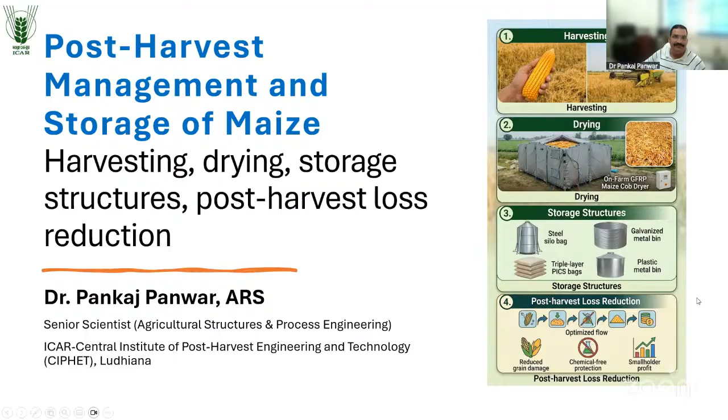As you see here, harvesting, drying, and storage - all these are components of the maize value chain. But the management of post-harvest is started just from harvesting. So we have to understand that timing is very crucial for harvesting, and moisture content generally we observe is 25 to 30%.

But there is one point which I would like to draw your attention to. Before shelling, that 25 or 35% moisture content should be reduced up to 17 to 18%. Otherwise our grain would be broken or quality will be seriously affected - I mean, aflatoxin or contamination, the environment would be more conducive. So we have to reduce our maize to 17 to 18% moisture before shelling.

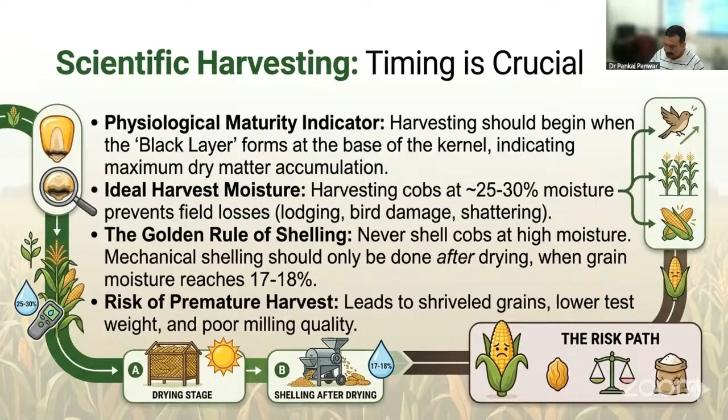And one more important thing is when we harvest the product, we have to optimize the moisture content. Otherwise these micro cracks in the grains are very conducive for Aspergillus flavus, leading to aflatoxin as I said. So before shelling, we have to dry our maize cob produce properly.

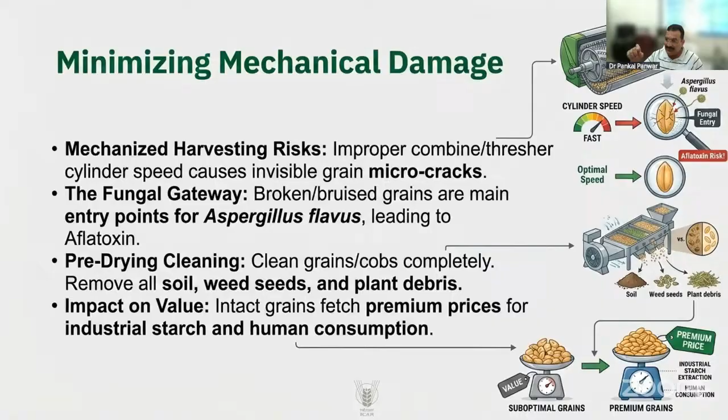Drying locations are sometimes fields, sometimes roadsides, and even open spaces - you can see this anywhere in the country. So the risk factor is rewetting and fungal contamination, and ultimately quality loss, and our product would be in serious condition. So my concern is we have to dry properly, then we will think about the best quality of end product.

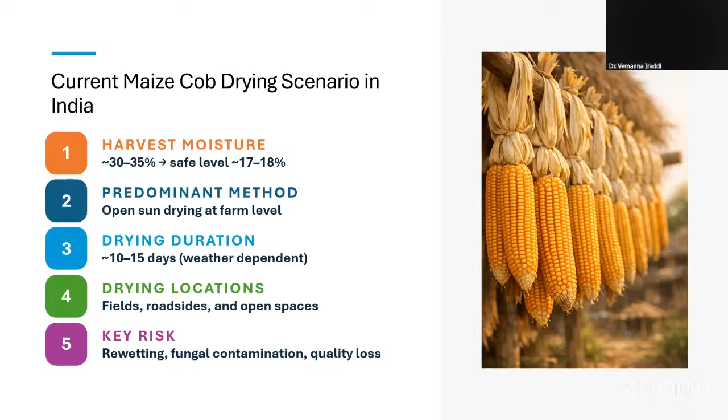And the existing scenario is, you can see there are a lot of dryers available, but most of them are for grain drying.

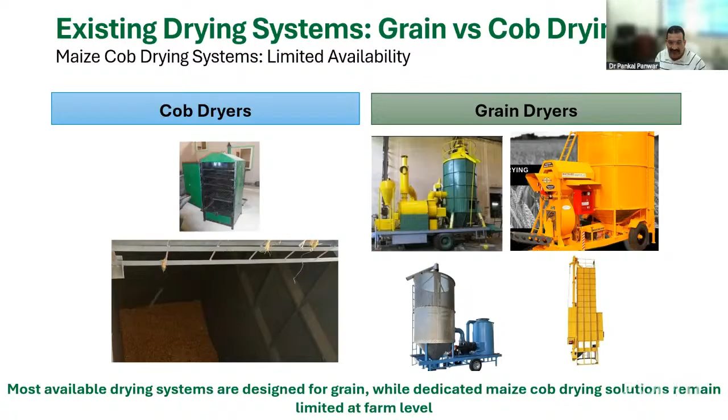A cob dryer specially designed for maize cob is not available. Some dryers I have seen are actually designed for other purposes, but people use them anyway, and they have faulty designs. So a proper cob dryer is very much required for cob drying purpose, and it's a very crucial technological gap. Limited farm drying systems for intact maize cobs are available, but they are costly or energy intensive, and there is no portability or farmer level solution.

Based on this background, we started in 2021 to develop a GFRP based humidity responsive maize dryer for decentralized use. GFRP is a fiber based material, you can say it's glass fiber reinforced plastic. I can explain it in the next slide. But with this background, you can understand why we have developed a new dryer.

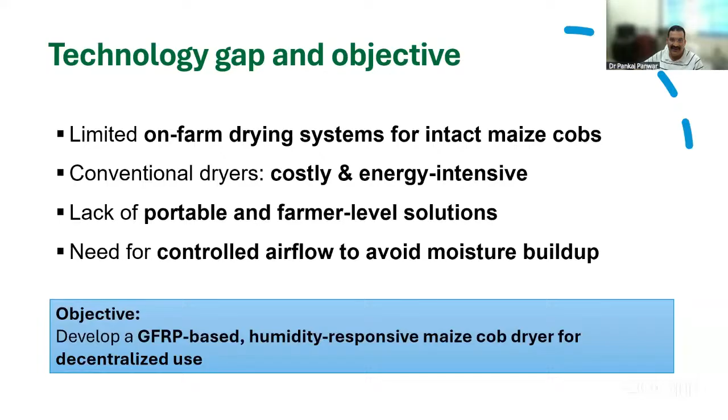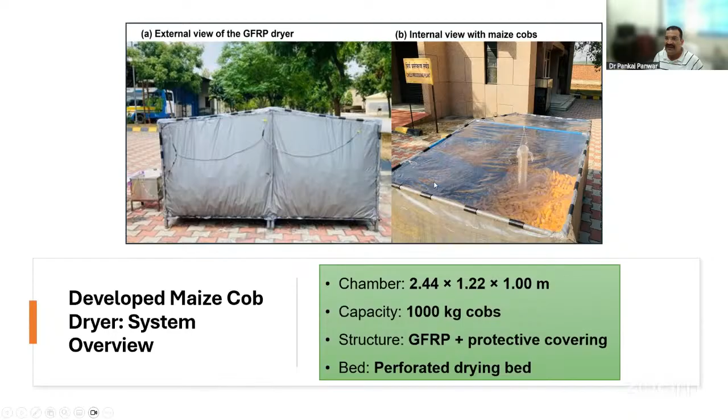The structure, as I said, is GFRP with protective covering. All the material is corrosion resistant, so there is no bother for corrosion, and the shelf life or durability is very good, it is very durable. The roof of the dryer is transparent, open space, so I will explain it. What is the key design feature of this novelty?

One more thing about how it works: greenhouse assisted drying. The transparent roof, as I showed in our previous slide, gains heat from solar radiation, and that elevates the chamber temperature and improves the drying microclimate.

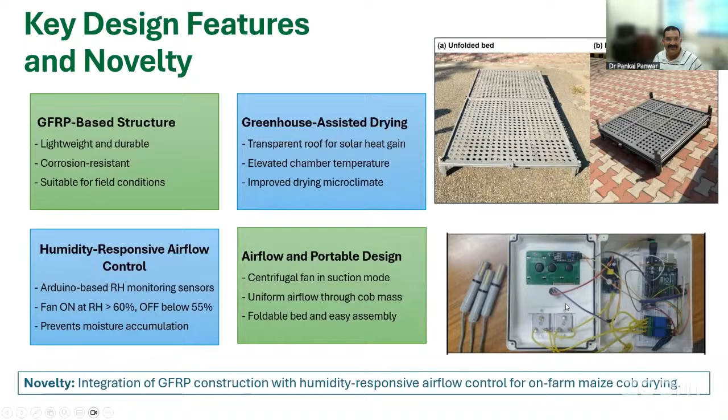The foldable bed and assembly can be put together in just a few minutes, it's very easy to assemble. Now, the working principle of that dryer, most of you want to know what is the working principle.

So you can see this dryer, the solar radiation goes through that transparent roof into the chamber, and the chamber is heated. Due to that heating, the cobs release moisture and increase the relative humidity. Because of that, humidity is sensed through the sensor that detects the RH and commands the fan on. So the fan is started, and then the moist air exits, and solar radiation continues. This cycle is continuously running and your material is going to be dried.

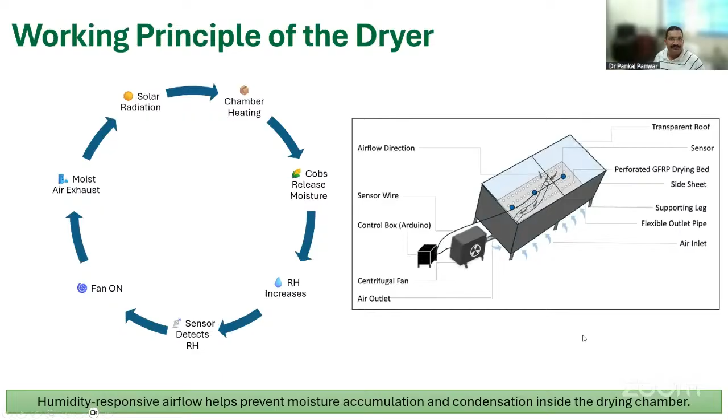Field performance, we have tested that dryer after its fabrication, completion, or development. We have tested it 2-3 times at CIPHET, and even the cob provided by IIMR, that is also our co-PI, one scientist from IIMR, so he provided the maize cob.

The initial moisture content which we observed was 36%, and we have to dry it, as I said, to 17 to 18%. So from 36 to 17% we have dried it, and the major observation is in this condition the microclimate temperature is around 5 degrees Celsius higher, and relative humidity is 9% lower. We have also found uniform drying, and there was no fungal growth.

So we have achieved this without any auxiliary heating. We did not give any extra heating or drying through an electrical heater or any other kind of drying. We didn't provide that here. And you can see the drying rate.

Actually, up to 25% moisture content, the drying rate was very high, and gradually it was decreasing, and at around 20% moisture content, it's near 1. So you can see this is a very nice observation.

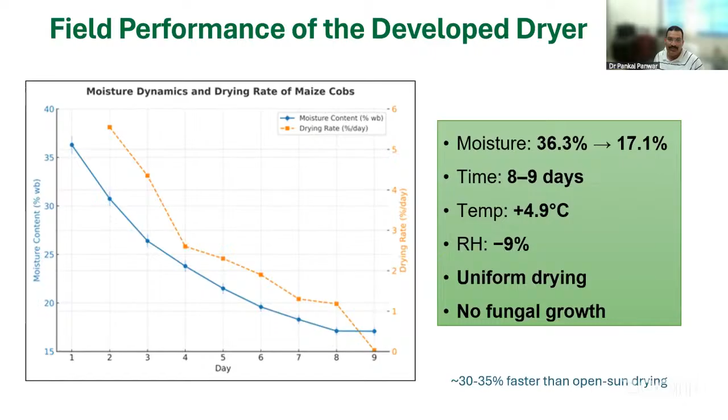Operational and practical significance: you can see the overall energy consumption. This energy is electrical energy. So 20 kilowatt hour per batch means 20 units of electrical heating is used only for 1 ton of maize cob. This is very, very low compared to other contemporary dryers.

But consider one thing, we did not provide any auxiliary heating here. And the specific energy is very low, 0.086 kilowatt hour per kilogram of water removed. It is very, very low. And the total weight is 89 kilograms.

So it is portable. This is the total weight, but it is foldable or reassemblable. You can detach all the pipes, all the fittings. So the maximum weight is of our drying bed, which is also made of GFRP, as I said. So the weight is only 30 kilogram for the bed, and including the pipes, fittings, everything, the total weight is 89 kilograms.

So we can say it is very easy to move from one place to another place.

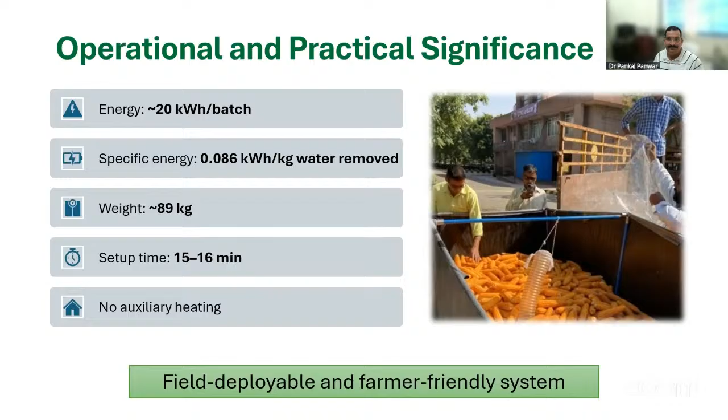And we have also tested this system under raining conditions during Kharif season. We observed at CIPHET for 2 or 3 days in Kharif season, during rain events under field condition.

So we have not observed any kind of defect or mishappening with our system. Our protective cover ensures safe and stable operation during rain events, so our maize is intact. We have checked that, so you can say in rainy conditions, we can use it.

As far as techno-economic consideration, this is very important because every technology will be sustained or feasible based on these techno-economic considerations. The cost, if we compare to contemporary dryers, is only 45,000 rupees.

This is our research output fabrication cost, not commercial level. When it is commercialized, I hope the total cost would be around 30 to 35,000 rupees, with very low maintenance, because there is no sophisticated system. It is very easy and simple, but we have smartly used the greenhouse effect to dry our material.

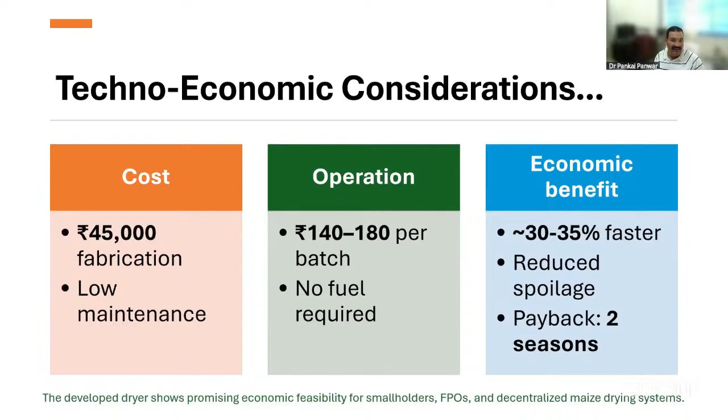In short, the developed dryer shows promising economic feasibility for smallholder FPOs and decentralized maize cob drying systems. Please underline this line: we have developed this dryer for a decentralized maize drying system, meaning our small farmers can dry their produce at the farm level. This is why we have designed this dryer.

Its role in the maize value chain is very effective, because if we want to strengthen our maize value chain, we have to divide the drying into two parts: one is maize cob drying before selling, then selling, and then grain drying. Only then can we maintain the needed or required value of our product.

It enables timely drying at the farm level, reducing the risk of rewetting or fungal growth. In the Kharif season in Ludhiana or northern India, I have observed over 3 years that during September and October, rain events are very frequent. So if we dry our cob in a normal field or bare land, it creates a very crucial condition as far as quality is concerned.

In this case, if anyone uses this dryer, they can easily avoid these conditions, and improve grain quality before storage. If we want our product to be better in storage, we have to store good quality product suitable for FPOs and small processing units.

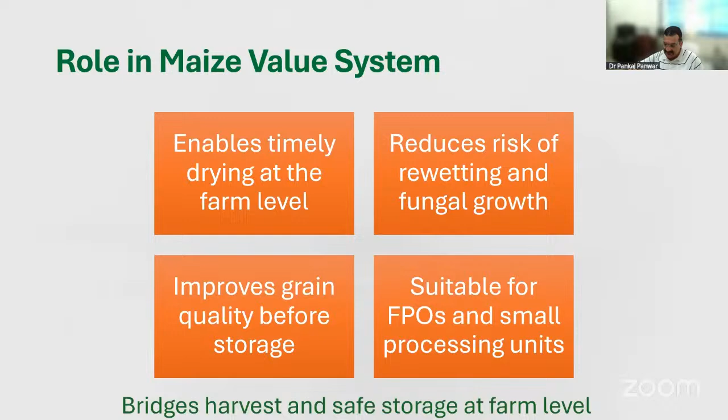We have also developed one more dryer, the hot air maize cob dryer, for when someone wants faster drying. The drying time is only 24 hours, and energy consumption is 30 kilowatt hours per batch. Thermal efficiency is 78%, and the cost is around 1 lakh rupees, suitable for small scale, controlled and faster drying applications.

Suppose someone wants lower level seed production or a smaller quantity, they can take this dryer, it is very effective. In this dryer there is auxiliary heating, an electrical heater is used for heating the material.

It depends upon you. If you increase the temperature, you can dry your maize cob in just 10 hours. But we have optimized at 50 degrees Celsius, where it takes 24 to 25 hours.

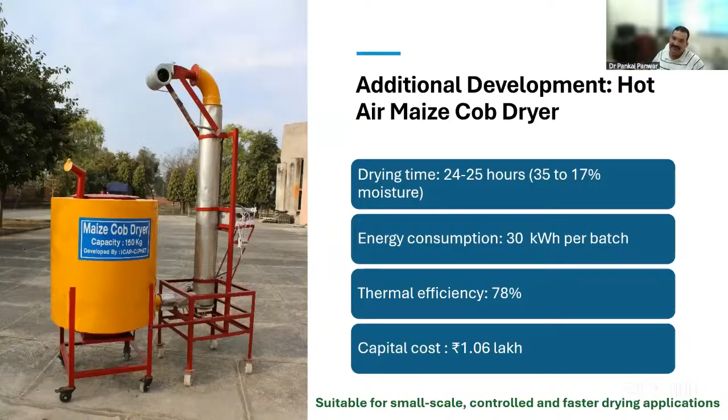As far as storage is concerned, I have already said that if we want good quality material in the stored product, we have to plan before storing. So I have put here some PICS bags, the triple layer airtight solution you may all be aware of. Nowadays it is being used even in rural areas, I have seen. It is good for small level storage.

One thing which is very important: you have to consider the proper moisture content before storage. It should be 14% or less than 14%.

Otherwise your product will deteriorate. Metal bins, you all are aware of those, so you can use them. FPO silo bags and steel structures are also popular nowadays. Whoever wants to improve their storage structure can adopt these things.

Structural hygiene is also important. Suppose you have these kinds of structures, you should regularly clean them and practice rigorous grain residual and sanitation hygiene there. Only then can you maintain your quality.

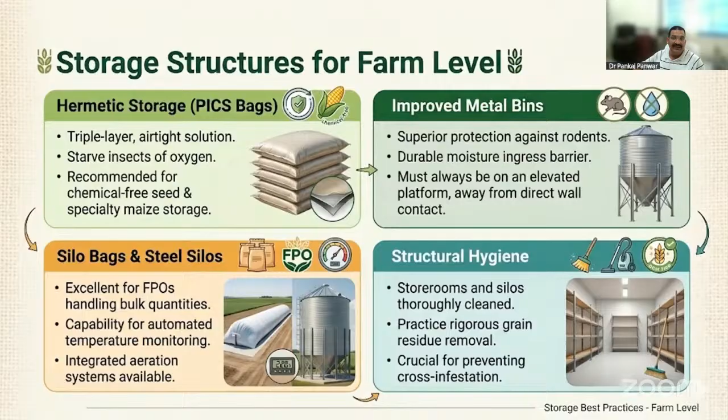Managing storage quality and losses. Most important, not only in maize but in every case, is moisture content. Moisture content is very crucial. You can use 12% moisture content for other grains. 12% is very nice for storage, but up to 14% it is safe for aspergillus. For aflatoxin, less than or equal to 13% is okay. We have to think about this. This is a very crucial thing.

And proper grain cooling strategy. It's not just that you put your grain in a bag or silo structure, but we have to think about the proper grain cooling strategy, meaning aeration kind of things, because grain is also a living thing. It respires, and during respiration temperature and humidity increase, so we have to make provisions to maintain those parameters.

Routine grain inspection is also important. Inspect your grain every 15 days and detect issues—you can smell them, and there are so many technologies and methods available, but the thing is you should be aware of that.

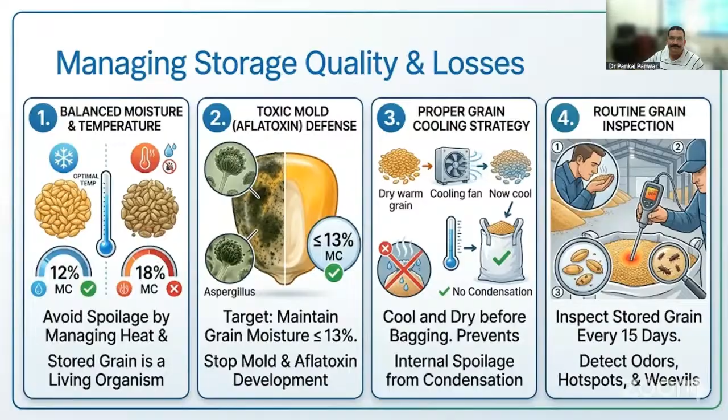Economic impact—there's 10 to 15% post-harvest loss. By using these things we can avoid these losses. Quality is non-negotiable. You can see in India many companies import maize from other countries only for quality reasons. So you can think about that.

Quality is non-negotiable. Our motive is to produce high quality maize, and to achieve that objective we have designed and developed different kinds of things, because it is very crucial to produce a high quality value product. The next step in the value chain: safely stored maize is the foundation for profitable food products. Nowadays there are many structures, many kinds as I discussed in earlier slides, so we can use them.

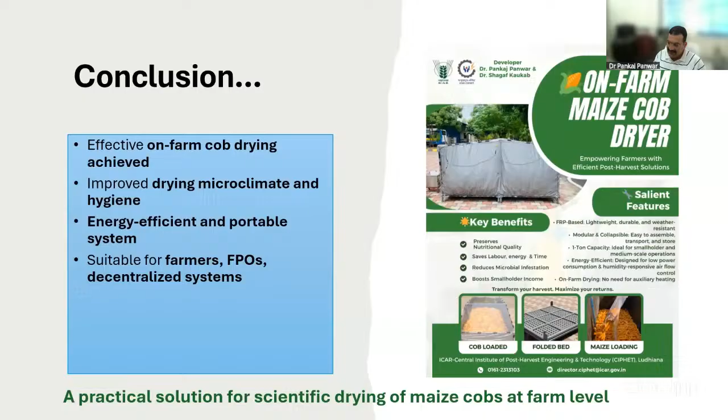I would like to say that we recently got a patent, 10 to 15 days before, on this machine. We have published papers, and we are searching for a manufacturer, because CIPHET is a research institute—we cannot multiply these dryers ourselves. We do the research and develop the technology, and then a manufacturer comes and takes this technology to produce it. So I want to tell all the groups listening, if you are interested in manufacturing these kinds of machines, please contact us. We have proper technology, we will guide you, and you can take this technology from CIPHET and make it available for normal farmers.

So we will continue on the topic of post-harvest management, storage of maize. Our next speaker is Mr. Shashwat Varia, representing Steamtech Innovative Machinery Private Limited, a Gujarat-based company. Mr. Shashwat will be presenting on advanced grain drying and post-harvest machinery, especially of maize. He has very extensive experience in scientific grain drying technologies and post-harvest solutions. Today he will deliver a lecture on scientific grain drying and post-harvest management. So Mr. Shashwat, over to you, and you can interact with the participants.

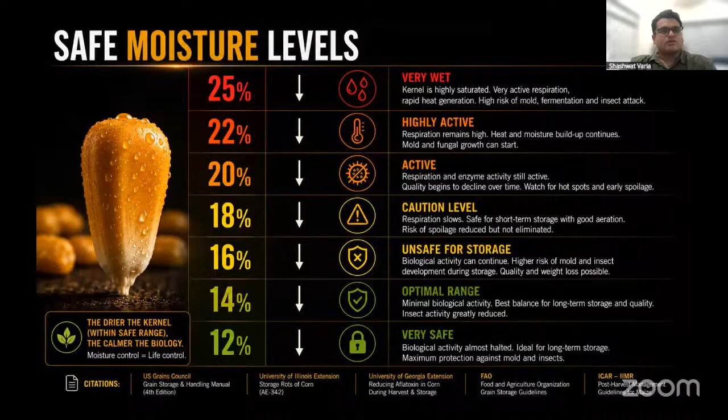So why does moisture move? We need to know why moisture moves inside the kernel. Inside the kernel, at different places the moisture is different - at the bottom the moisture is low, and in the center the moisture is extremely high. This is one of the main reasons stresses occur inside the kernel, because water causes pressure, that causes stress, and that causes cracks inside the kernel.

And these cracks are the main reason mycotoxins get a chance to enter the kernel from the external environment.

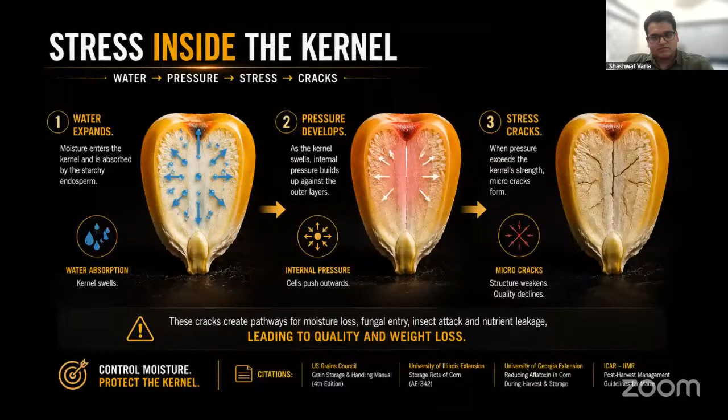As we all know, respiration never stops. The carbohydrates take in oxygen, give out carbon dioxide, water vapor, and energy - heat - inside whatever storage space is available. If it is inside a gunny bag, it will give out heat there. If it is inside a silo, it will give out heat there. That is why we need better aeration technologies for silos, for warehouses, everywhere.

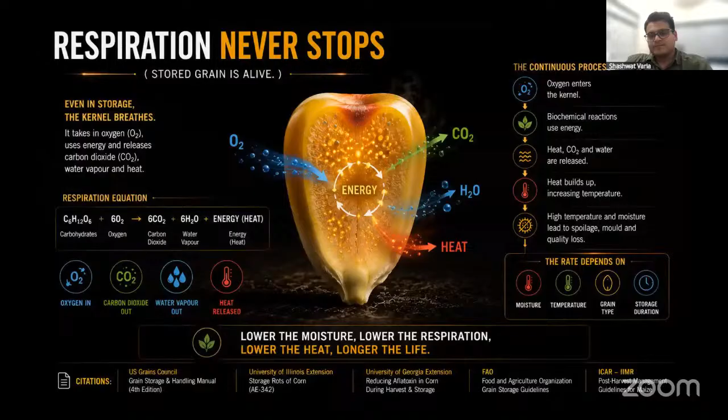So a maize kernel is not just a commodity, it is a living biological system, as we all know. Right now we will focus on the losses.

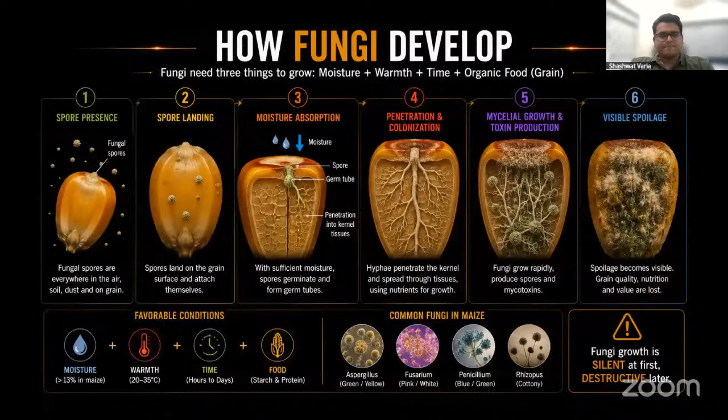Another main type of mycotoxin is the aflatoxin, the B1 type, that is the most common.

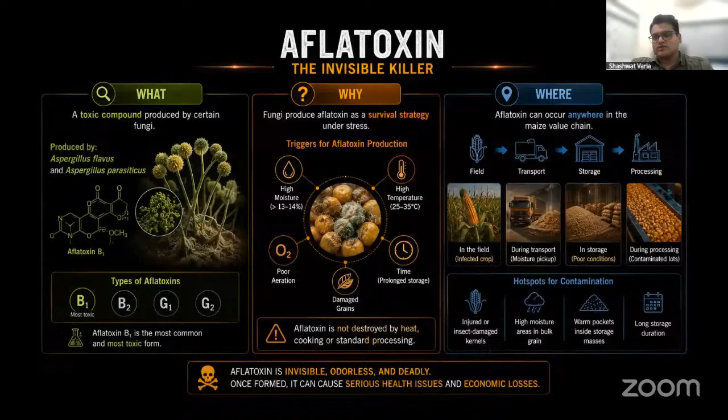And why is it produced? Because it is left out in the field open, maybe during transport, they pick up moisture. In storage, there are poor conditions, or during processing, there are contaminated lots. There are two different kinds of lots that are being used. So even the good grain might get affected because of this.

So every hour after harvest decides grain quality. Now, why should we dry? Basically to prevent spoilage, to protect quality, for better margins, better profits, and for safer storage.

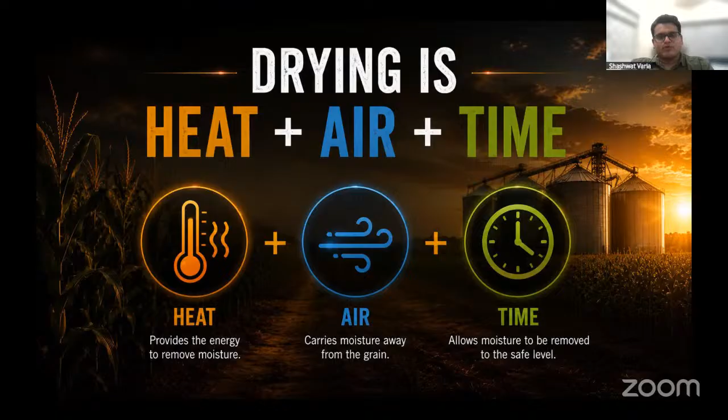Now, what is drying? Drying is basically heat plus air plus time. All of these combined in respective proportions, we get drying.

Now, what happens actually while drying? There are two aspects. First is heat transfer, second is mass transfer. People might think that if we just heat up a chamber or a room, it will actually act as a dryer. But in absence of an external fan or an external aeration mechanism, it will not actually dry the kernel. The droplets might even come back, dripping down from the walls back onto the grain.

So there are two things. First is heat transfer, where through convection, conduction, or radiation, through any of these principles, the air gets heated and passes through the kernel surface, and then the moisture comes out from the shell first and then from the inside. So first is heat transfer, where hot air passes through the kernel, and second is mass transfer, where moisture moves from inside the kernel to the air, and the final exit is the moist air coming out of the dryer.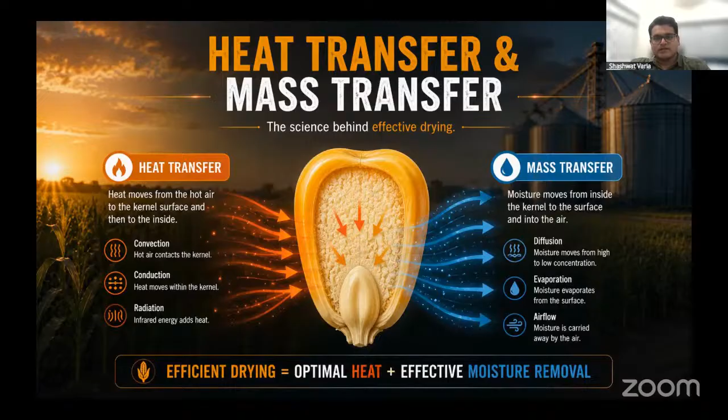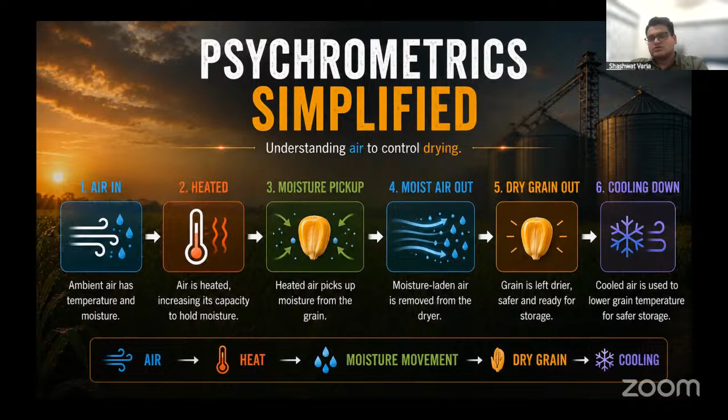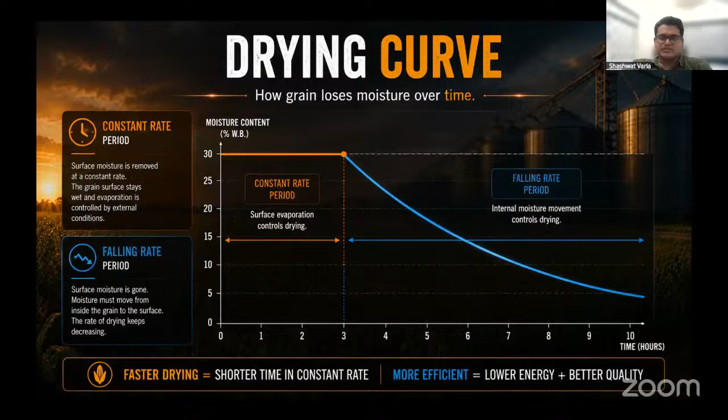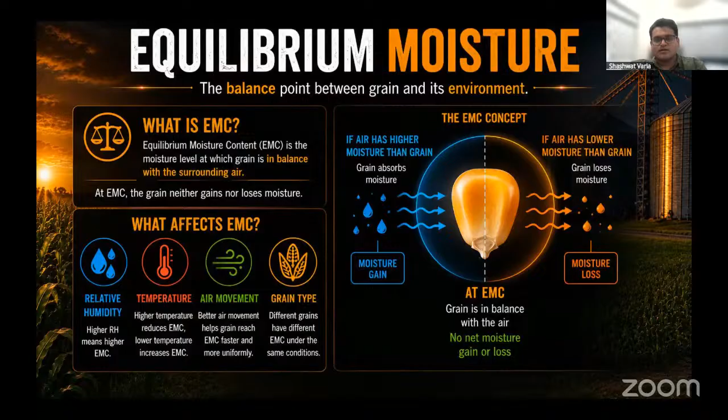So drying is not removing water actually, it is preserving the value that is created. So basically, coming on to the drying part, this is the evolution of drying.

Right now, even 70, 80, 90% of the farmers and majority of traders are doing sun drying. We as a company receive a lot of queries from people asking how we should dry, and to please teach them. So we have our engineers deputed around India. They go from one place to another just to explain that grains in such bulk quantities are not meant to be dried on field or under the sun, because first, they will be weather dependent.

Let's say if somebody wants to dry 10 tons in a single day, they cannot do it with sun drying. But with smart mechanical drying, you can do it, and you can also achieve 10 tons per hour. So we are actually catering right now with capacities ranging from 1 ton per hour up to 60 tons per hour for maize and other commodities.

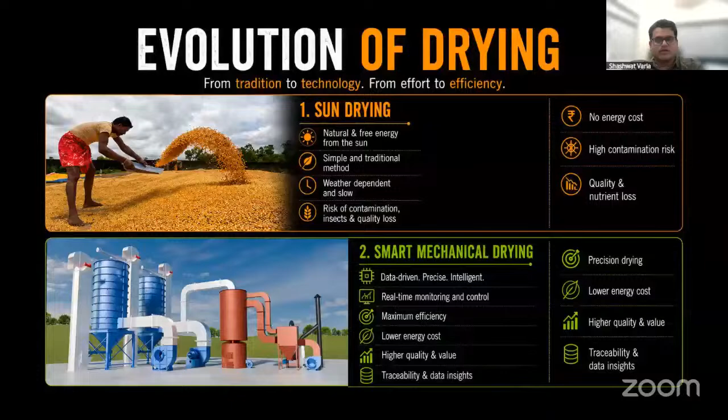Now, what kind of different dryers do we have in the market? In the market, we usually have three types of mechanical dryers. First is the portable dryer, second is the column type dryer - these both are batch dryers - and third is the continuous type dryer that we are manufacturing at Steam Tech.

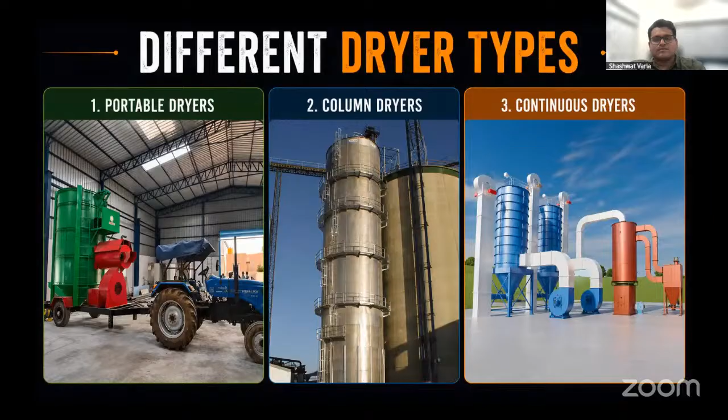The weather dependency differs among all, but it will be the best in continuous dryers because they are in a protected environment. The drying time will also vary. As sir mentioned earlier, radiation drying might take more than 6, 7, 8 days - up to 8 days. So drying time is very long in sun drying, then in portable dryers, then in column dryers, and it is the least in continuous dryers.

Main thing we need to focus on here is moisture control. We cannot control moisture if we don't have the surroundings in our control. In sun drying, it will be very poor or inconsistent. In portable dryers, it will be moderate because we'll have an external bucket elevator that churns the grains, which might also cause cracks in the kernel. The same happens in column dryers. Moisture control will be the best in continuous dryers because the kernel will only pass through the dryer once - it is a single pass drying system.

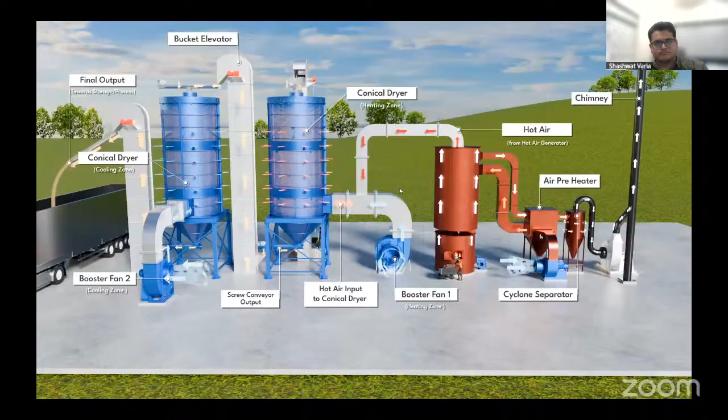So here we actually saw the entire working of a dryer that we manufacture, and this is the same plant but just a different model.

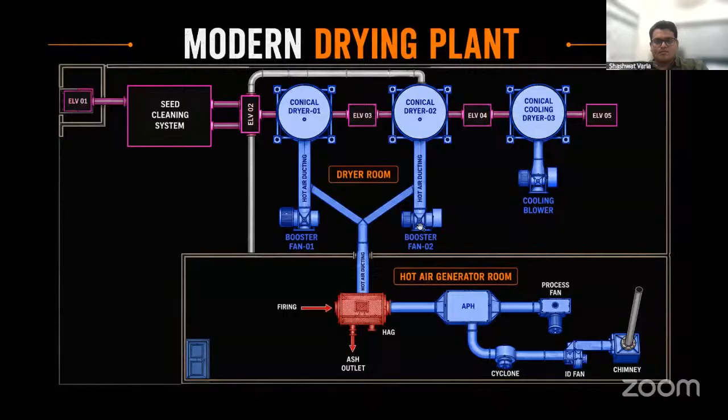So the second part of post-harvest management is silos. Why do silos actually matter? In traditional storage, moisture migrates, there can be rodent infestation, birds, insects, and a lot of manual handling, and this leads to losses.

In scientific silos, all of this is controlled. We have controlled aeration mechanisms, uniform temperature across the entire silo, low losses and better traceability - that is the main benefit of all. Everything is automated and you get good quality.

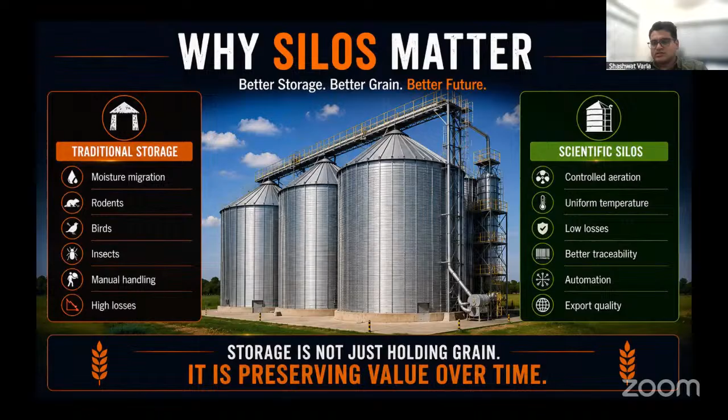So what design philosophy and principles do we follow at SteamTech? We are actually an R&D first company. We do R&D for all of our models, and the video that you just saw is also a patented technology from our company. We hold 15 plus patents in different fields. We basically follow convection heat drying principles, and we follow that operation costs should be very low, so we engineer our machines with that in mind. Last, we continuously innovate and give guaranteed results.

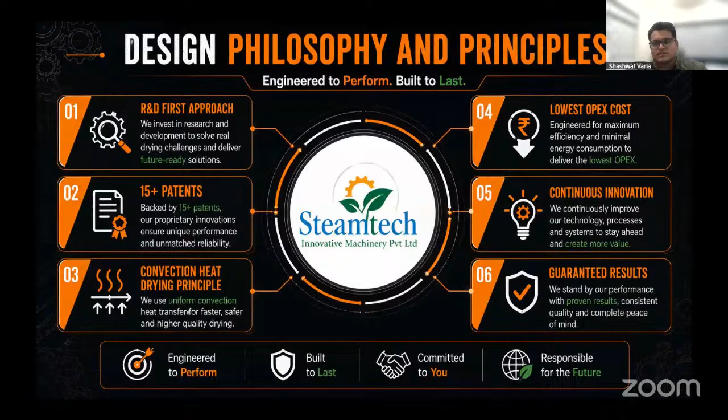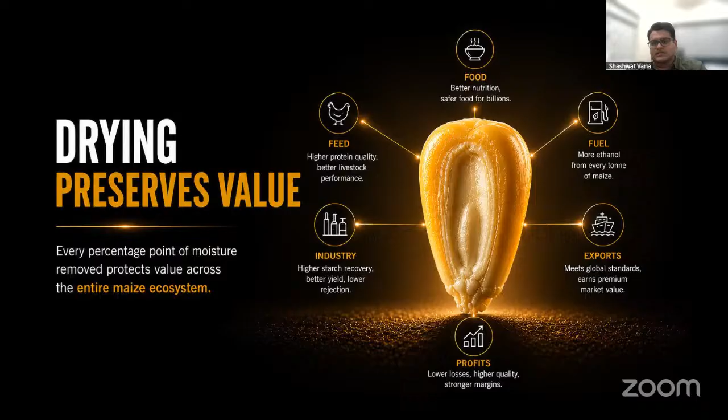So basically, we come down to India's missing drying infrastructure right now. The current reality is that we have good production - according to the latest news, we did approximately 51 to 52 million metric tons this year. So where we are lacking is storage, the drying infrastructure, while there is sufficient industry demand.

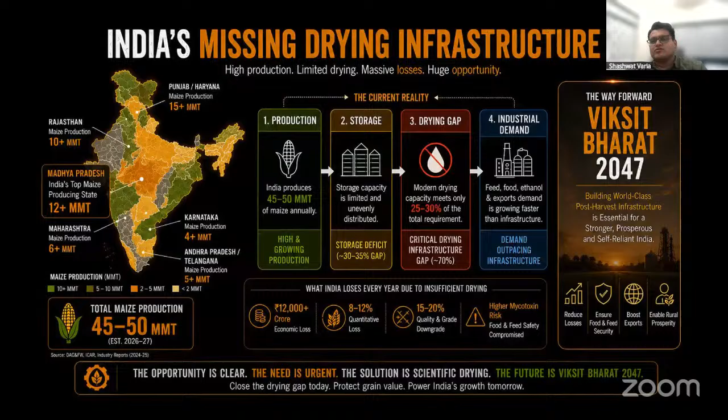So what should we do for the 2047 vision? We propose a national drying infrastructure, a district model, where dryers and silos are at the FPO level. Every FPO should have a dryer and silo, and this has to be a multi-commodity dryer - not only for maize, but also for soybean, groundnut, pulses, all kinds of dal. Everything can be dried from a single dryer.

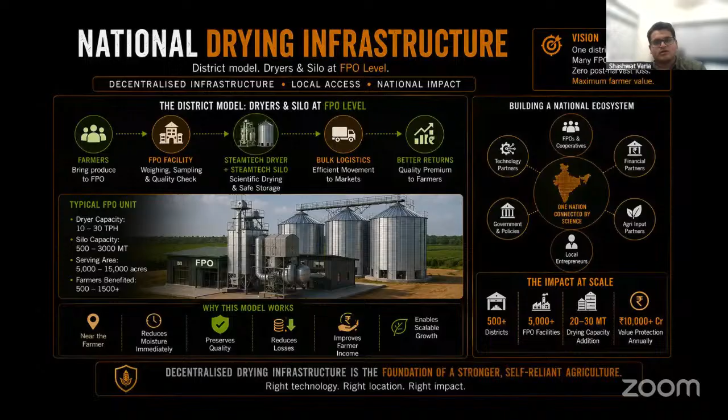So what we actually propose is drying as a service, where FPOs or any entrepreneur or public-private partnership can install these dryers and offer the drying service for a fee. This is the simplest and most easily scalable kind of model that we can implement.

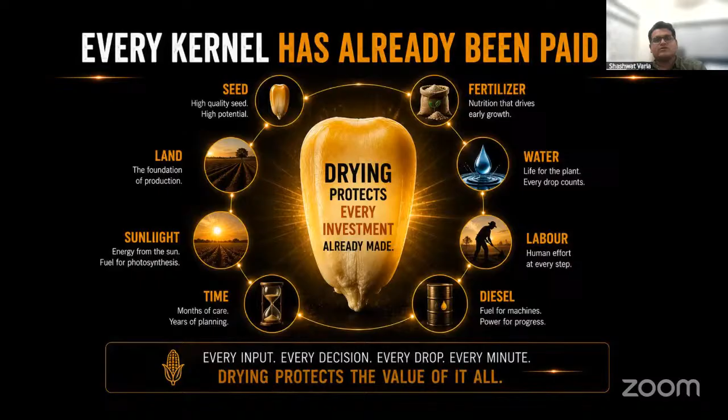The final thing, I'll end here. Every kernel has already been paid for. Every maize kernel that we are producing has been given fertilizer, water - we have invested labor, diesel, time, sunlight, land, seed, everything. Drying protects every investment that is already made. So we are protecting what the value actually is.

Final message: drying does not create value. It protects every value that nature has already created. Okay, thank you.